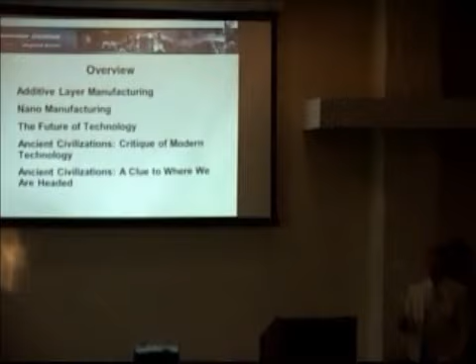So now, giving you a little overview, I'm going to talk about some of the new types of technology we're doing in the world. Sometimes you think, oh gee, we're going to talk about manufacturing, time to go to sleep. But no, the things being done are quite exciting. There's a lot of possibilities with additive layer manufacturing that I'll get into, and then how that transitions into nano manufacturing, nanotechnology. And then we go into the future of technology. What is that going to be like? And then we're going to ask some real questions about what kind of things are being focused on, what might be wrong, and how we can correct that.

And then we'll look at ancient civilizations that gave us all kinds of blueprints on where we're really going. So about halfway through, it should be about midnight.

We should finish around 2 or 3 a.m. Are you ready? Well, I do actually plan to do this in 1 hour.

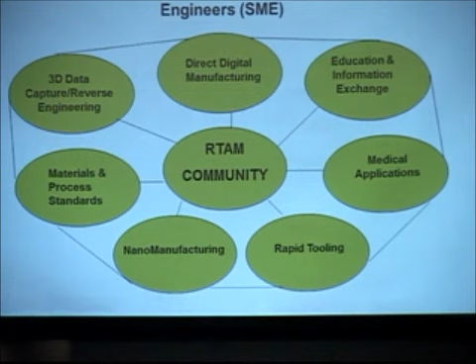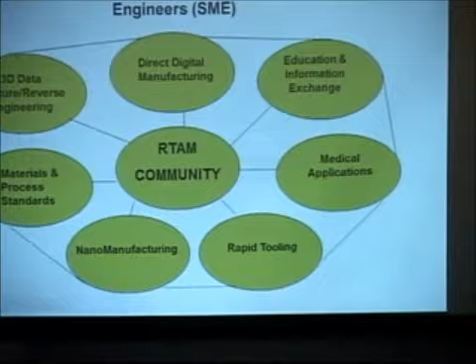Now, the technology part kind of came to me back in 2003 when I was chairman of the National Rapid Technologies and Additive Manufacturing Community, composed of thousands of members. At that time, I started these national tech groups. The one I always had dreamt of was the nano manufacturing tech group, because the government is spending billions in research in nanotechnology, and so are other countries. I felt that the Society of Manufacturing Engineers, focusing on manufacturing, really should have a vocal presence in nanotechnology. But most people are focusing on nanotechnology, not on the nanomanufacturing aspect of it.

So I started that group, and even in the last couple of months, one of our webinars actually had attendees from 5 different countries, one person from Lithuania, and I thought, wow, we've really come a long way with this group. So that gives you a little background.

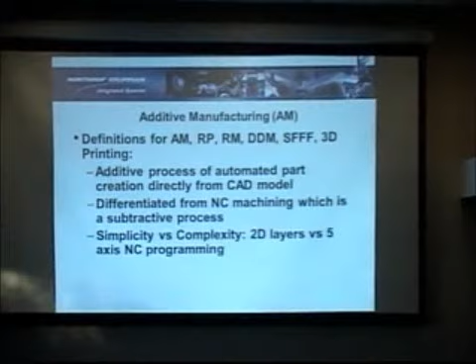Now, starting first with additive manufacturing, most of you don't know much about that unless you heard my other talk a couple of years ago. It's known as additive manufacturing, additive layer manufacturing, rapid prototyping, rapid manufacturing, direct digital manufacturing, solid freeform fabrication, or 3D printing. Have any of you heard of 3D printing? Okay, a few of you. Yeah, you see it in the news periodically. All that's based on additive manufacturing. What's so interesting is that first we have to differentiate it from regular machining. Like if you have a lathe or a milling machine, you have a cutter, and the cutter is cutting a part. It's like a sculptor, you're chiseling away till you get what you want.

Well, in a machine shop, you have the cutter moving in X, Y, and Z, and turning and cutting the metal part or plastic part, whatever it may be. And now if you have a very complex shape, then you have what's called 5-axis NC machining, where the cutter doesn't just go X, Y, and Z, but it also swerves in the I vector and J vector directions.

So it can move with all that swerving, and it's a very complex type of motion. I used to do that type of programming back in the early 80s.

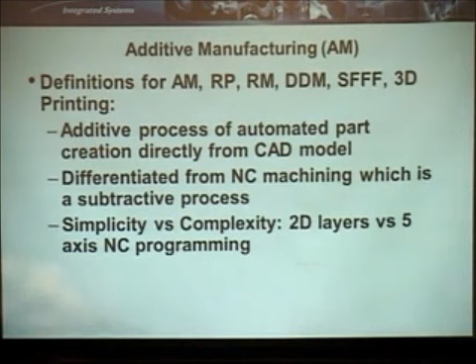Then people came up with this idea of additive layer, where instead of cutting away from something, you start out with nothing and you do it layer by layer. That way, all that complexity of 3 dimensions and even 5 axes is gone. It's reduced down to layers of X, Y. That's all. You just pile up the layers, and they melt into the previous layer or merge into it, and you get these kinds of parts that you grow on the machine.

It sounds funny, but you grow it, out of nylon powder or other metal powders. What happens is you're actually using a laser, for instance, to melt layer by layer. So as you make this part, it's already designed like this in CAD, in the computer, when you design it.

All these little gears are equidistant from the center portion that it turns on, because if they were touching, the laser would fuse it together and this thing would not turn. But you design it like this, and when it comes out of the machine, it's fully functional. There's no assembly required. This is completely working as is.

We can grow an entire grandfather clock in these types of machines, and when it comes out, all you do is add the weights and start the clock up. No assembly. So this is the type of thing that's possible with additive layer.

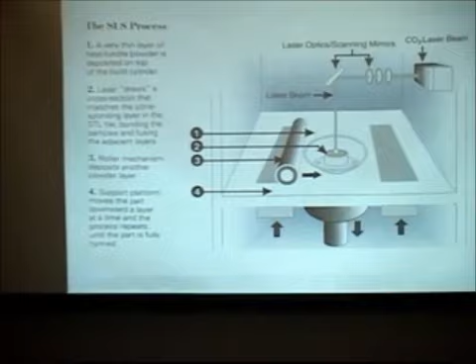Here's a little example of it. You can imagine this is the ship, halfway grown, with part of it inside being scanned layer by layer. After each layer, a roller rolls new powder across from one side, then the laser scans the next layer, and that layer moves down 4 thousandths of an inch, about the thickness of a human hair, to make room for the next layer. Then the other side moves up slightly with more powder, the roller rolls it across, and you scan again, repeating until the whole part is complete.

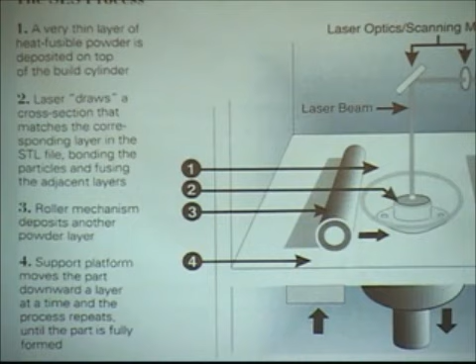That's sort of what it looks like. Oh, there's sound on this one. Can you turn that up, or can you hear it?

Layer of material to be prepared. This process continues, and in a matter of hours, the entire part has been built. It'll do it over again.

Well, it should. So I was wrong. Maybe we can go back.

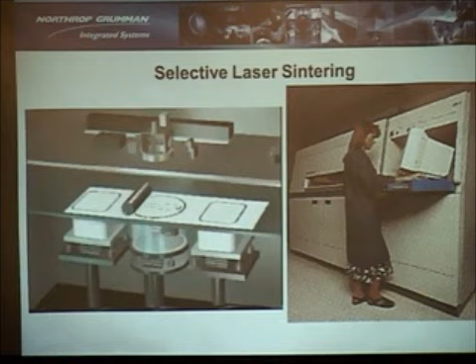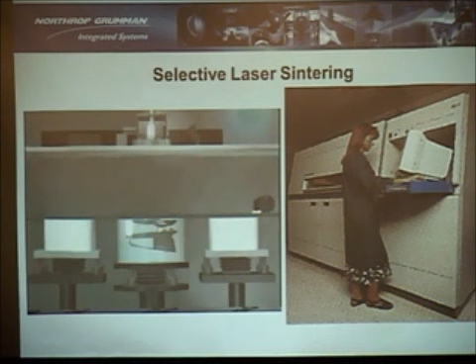A CAD design is transferred to the sinter station. A roller then deposits a precise amount of powder over the build area. The laser sinters, or almost melts, the powder to form a single layer of the prototype. The build area piston lowers, and the roller deposits another layer of material to be sintered. This process continues, and in a matter of hours, the entire part has been built.

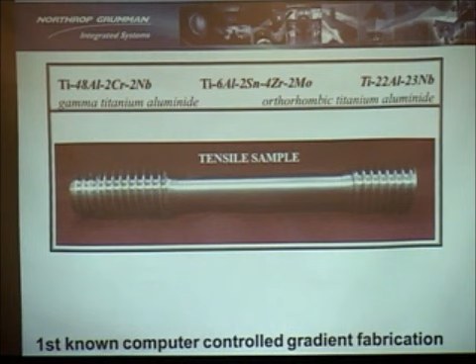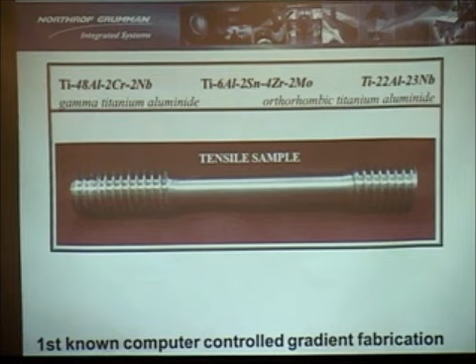So that gives you a little bit of an idea. Now, to get a bit more complicated, we're actually capable of this additive process using different powders and having them mix at the same time. Imagine metal powders of three different types of titanium alloys being deposited automatically through little tubes in certain amounts into the weld pool, where the laser is melting and placing the powder. Wherever the laser hits, the powder is melted and solidified, making a complete layer, and just like the previous example, it builds the part layer by layer, but with different materials.

This is the first known computer-controlled gradient fabrication. You could imagine an engine block that's 100% stainless steel on the inside, transitioning gradually to 100% copper on the outside to dissipate heat quickly, without the problem of coefficient of thermal expansion mismatch between two materials that shrink and expand at different rates and separate over time. Here you don't have that problem, because you can make things with different metals or plastics at the same time.

Before I get too far, I should pass these things around. There are different examples of things you can make, so take a look and pass those along.

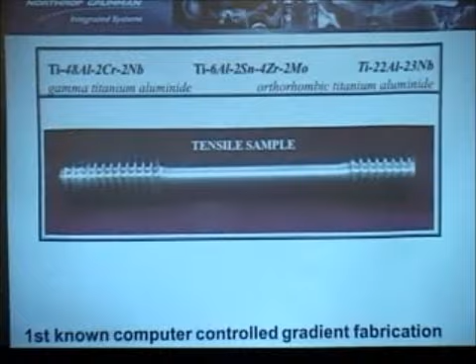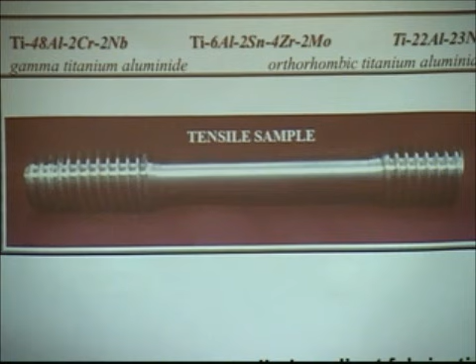Now the exciting thing is that as we're able to use different materials, the same company, Optomec, that's been doing this, has another section where they're actually growing layer by layer electronic transistors and components as an additive technique.